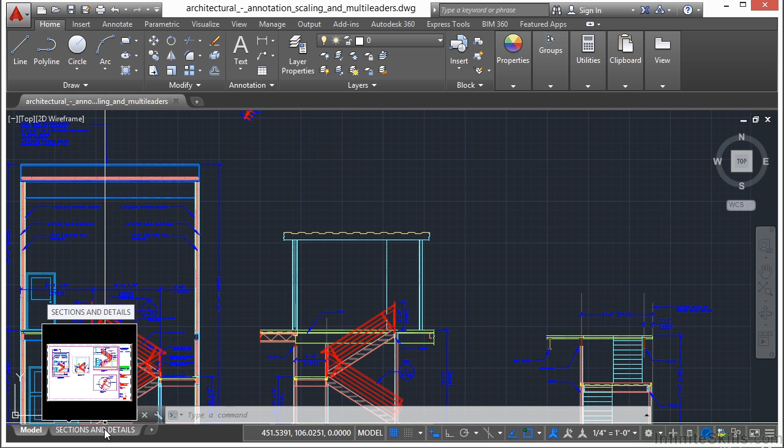So to start, we're going to make a new layout tab. To do that, just right-click on the layout tabs and click New Layout. That will create a tab called Layout 1. That name is fine for right now. So let's activate that tab by clicking on it. Just go to it, and we have a viewport already set up.

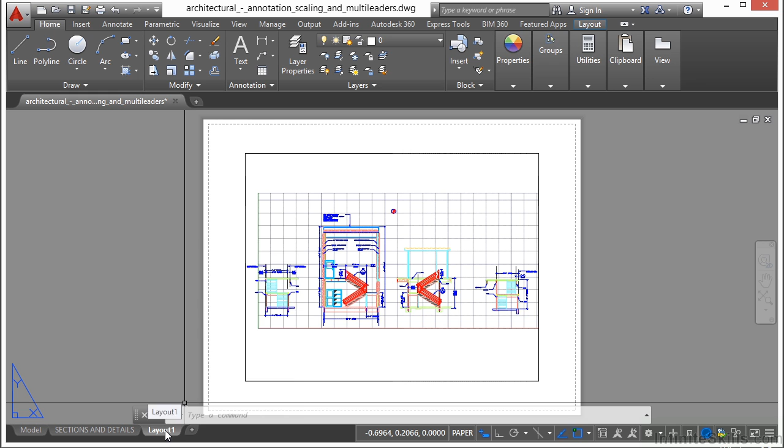Now let's go to the Page Setup Manager. It's real easy to get to. Just go down to your Layout tab, right-click on it, and go to Page Setup Manager. Now this window allows you to either pick a page setup already in the drawing or make a new one. Any names you see down here with asterisks on them, as we have here with Layout, Sections, and Details, are Paperspace tabs. Any others you see can actually be assigned to it. Right now we don't have any page setups in here, so in order to use our page setups, we're going to have to create a new one.

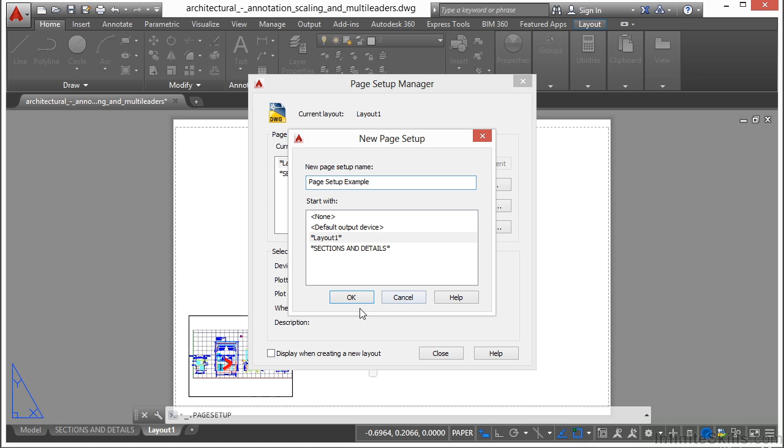So click on the New button. Let's give this a name. I'm just going to call it Page Setup Example. Now what you want to do with the names is give it a name that defines or describes what's going on. So if you're printing black and white on 8.5 by 11, give it a name similar to that. Keep them short, but make sure they're clear and well defined so that anyone using them knows and understands exactly what it is you're trying to do with that page setup. So give it a name, click OK.

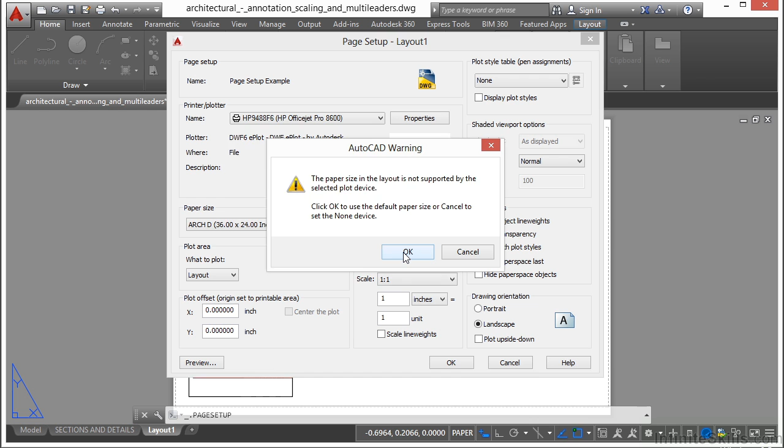Now we just go through all of the settings, just like we would when we were normally printing. So I'm going to pick my printer first. Since I only have one real printer to choose from, I'm going to pick it. And this gives me a warning. It says my page size is too big, and I realize that. I'm clicking OK, and it gives a description of what's going on here.

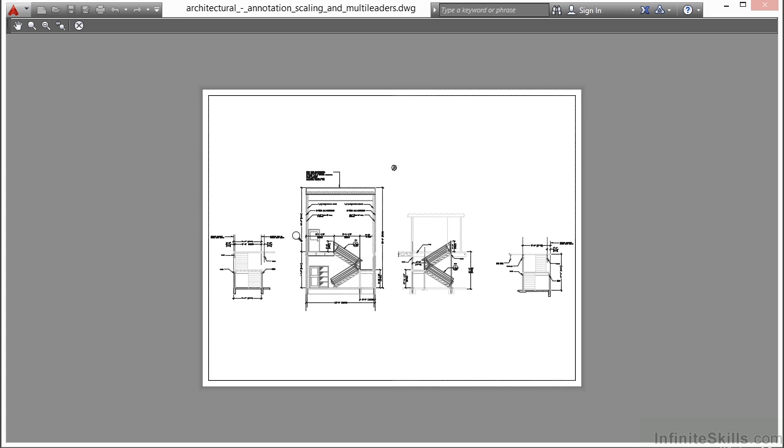Now I'm going to pick letter size for my paper size, and I want to pick extents. I want it to center the plot, and I want it to fit to the page. When you're ready, click on the preview button, and it will show you exactly what it's going to look like. See, that fits everything into an 8.5 by 11 size sheet. Works perfectly for me. Now I can zoom in and out with my scroll wheel, and I can also pan with my scroll wheel. Or if I right-click, I can get to pan and zoom, zoom window, or zoom original. When I'm finished, I just click exit.

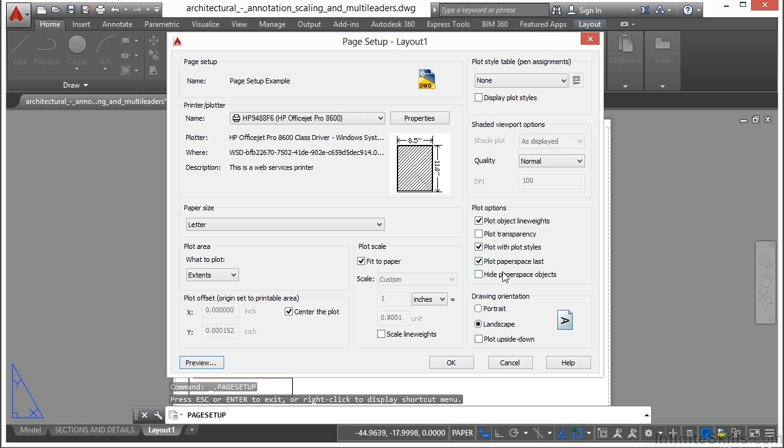Now when everything else is okay, make sure my portrait and landscape is set up. I'm not going to use a CTB file. Everything else here looks good. I'm going to click OK.

And now my page setup has been created, and now I can apply it to this Paperspace tab. So what I do is I select it, and I hit the Set Current button. Now when you do that, you'll see here it says Layout 1, and in parentheses it has the name of the page setup. That means it's been assigned to this Paperspace tab. This Paperspace tab does not have a page setup at all.

That's okay. I'm going to create one more, so I'm going to select New. Now you notice that I selected this page setup before I clicked New. This works just like it does in any of the other style creations, dimensions, text, etc. It will copy these settings, and then I'll just be able to tweak it however I want.

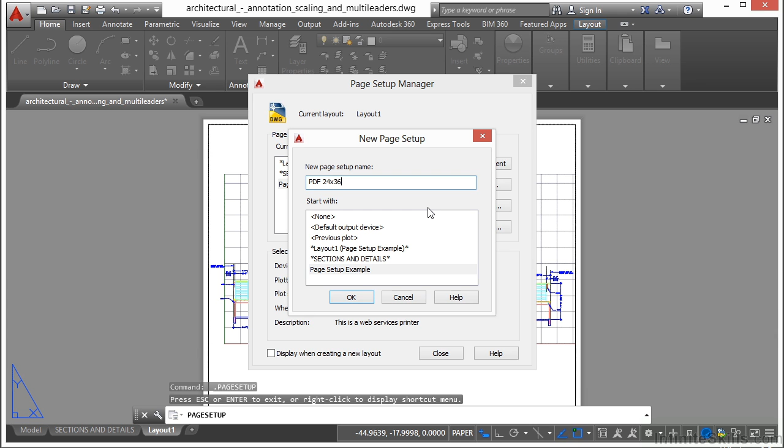I'm going to call this PDF 24 by 36, because that's what I'm going to create. With this page setup, my drawings will be printed not to paper, but to a PDF file, and it will be full size, 24 by 36. So I'm going to click OK.

AutoCAD, by default and out of the box, comes with several settings. I have some programs that I use, like Snagit, OneNote, and Nitro PDF Creator, that will allow me to print to those file types. Also, you have a Microsoft XPS document writer. You should have that if you're running Windows, which you should be. If you have a fax printer set up, or your default Windows printer, you can print to those types of files.

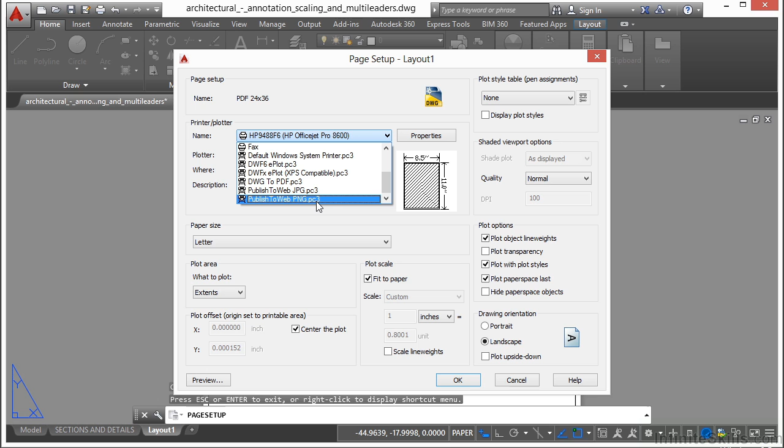AutoCAD itself comes with settings to print to a DWF file, a DWFX, a PDF, a JPEG, or a PNG file. And those are these options here. So instead of sending the document to a piece of paper, it sends it to one of these electronic file types. So this is a great way to share your drawings via email. Well, I'm going to use the DWG to PDF file.

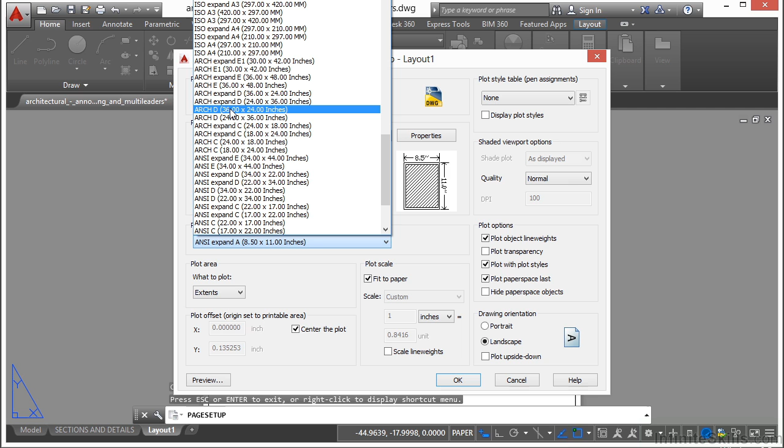I have a lot of options here available to me. Now, this is an architectural D size drawing, a 36 by 24 size sheet. Now, you see I have two options here, 36 by 24 and then 24 by 36. Well, this drawing is a 36 by 24 in reality. It's 36 wide, 24 tall. And the first number in your AutoCAD printing is what's going to be the width. So that's what I'm going to pick, 36 by 24.

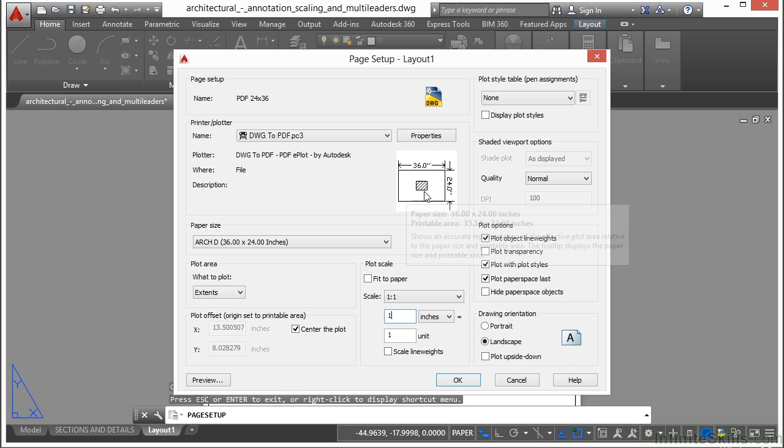Now I'm still set as the drawing to extents, and this is set to center. This is set to fit to paper. I'm going to turn that off, change my units to 1. And you can see here, this drawing is not really set up to be printed to that size. And you're going to find out that this happens to you quite often, where you think it's set up to be a certain way, but it really isn't. If I hit preview, you can see how small that is.

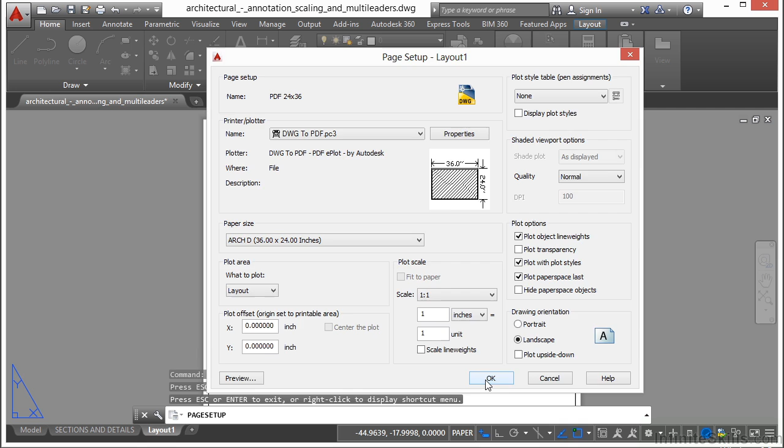What's happening here is that this Paperspace tab is set up to be 8.5 by 11. And that's okay, because I'm not going to apply it to this Paperspace tab. I'm going to apply it to this other one. So I am going to set up to layout 1:1. Now it's going to be 24 by 36 when I use this setting. I'm going to click OK. And now it's here as an option available to me. I'm going to click close.

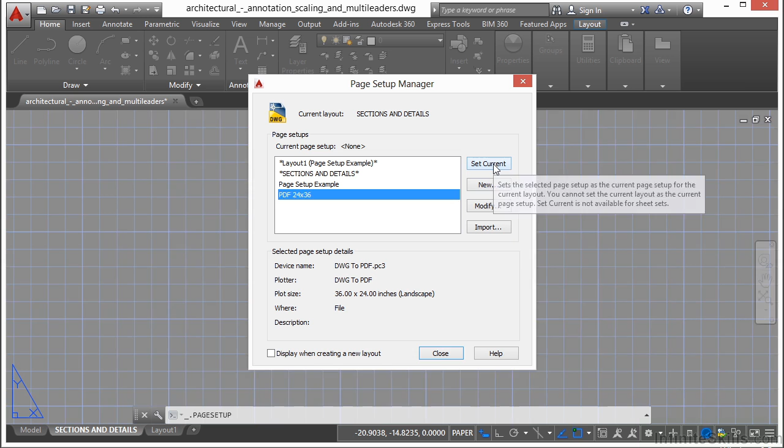I'm going to go to this Paperspace tab. I'm going to right click on it and go to my Page Setup Manager. And for this Paperspace tab, I'm going to select my PDF 24 by 36, pick Set Current, and click Close. Remember I talked about that dashed line? Here it is right there. That's the dashed line. So I'm going to have to reposition my viewport and my other drawing objects here to make sure it fits inside my sheet.

So I'm using the Move command, selecting everything. Now they have these little guidelines here in this drawing, so I'm going to try to use that. You can see the white paper is right here. That also gives me a guide as to my paper size. Now you can't snap to any of those points, so you just got to kind of eyeball it. And once you do that, let's look over here, and we see that it seems to be fitting into everything, and we're good. Now we can save the file, and we can go on from there.

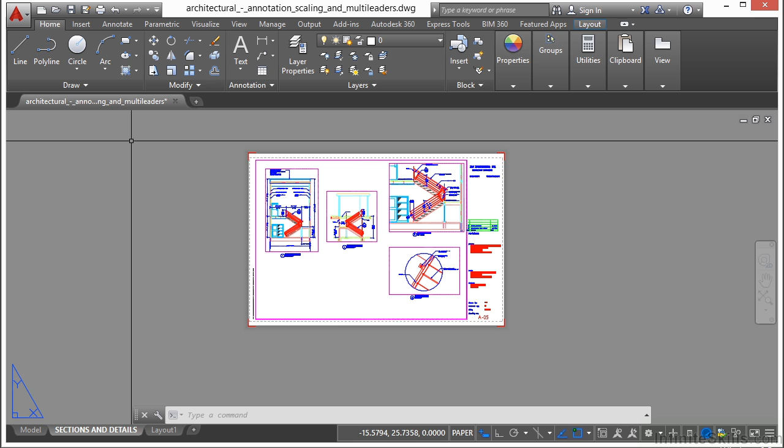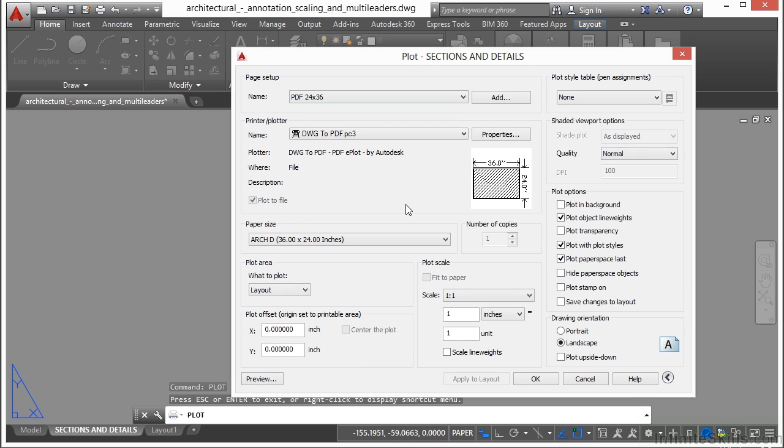Because now when I want to print, let's go to Print. I find my page setups. I select it. I hit my preview, see that it works. Right click, exit, and then click OK. I don't have to go through any of these settings. They all come up automatically for me, and I know they're correct. So it saves time and it makes sure you print correctly every time.